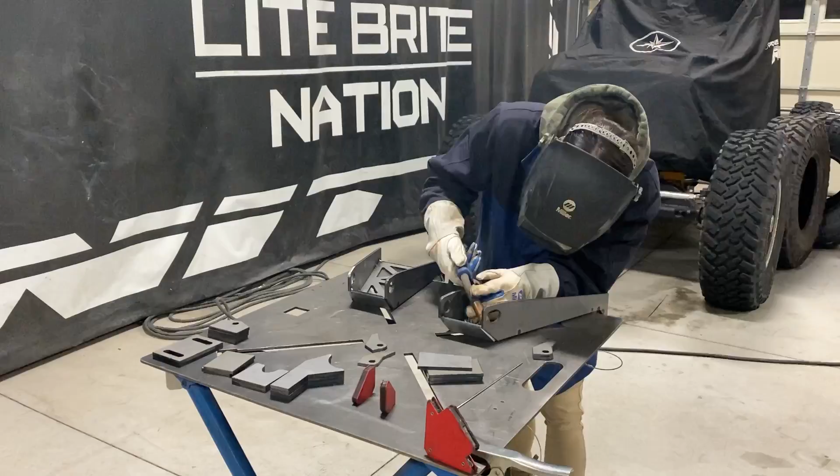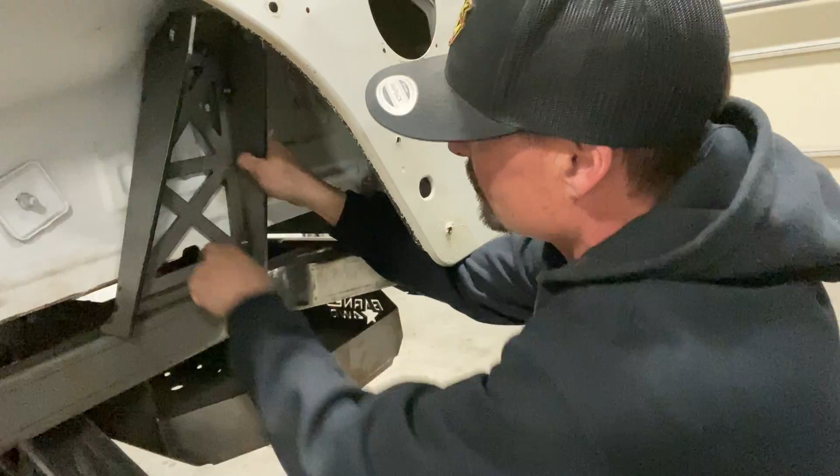Let me show you guys what I welded up. These things are sick. Can't wait. So that's gonna go up here, get welded across the top of the frame and then gusseted down the front. And we'll have room in the back to put even more gusset, but it's not touching the body and it's all the way up in this pocket.

And then the coilover should go straight down and it'll hang right off the back side of the axle, so that it should be almost perpendicular to that lower control arm. So we should have some pretty good control of this whole coilover setup. It's gonna be beautiful and work phenomenal.

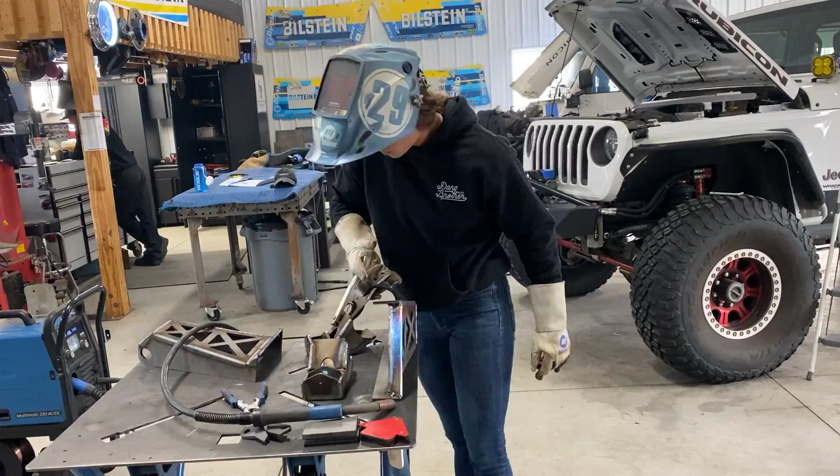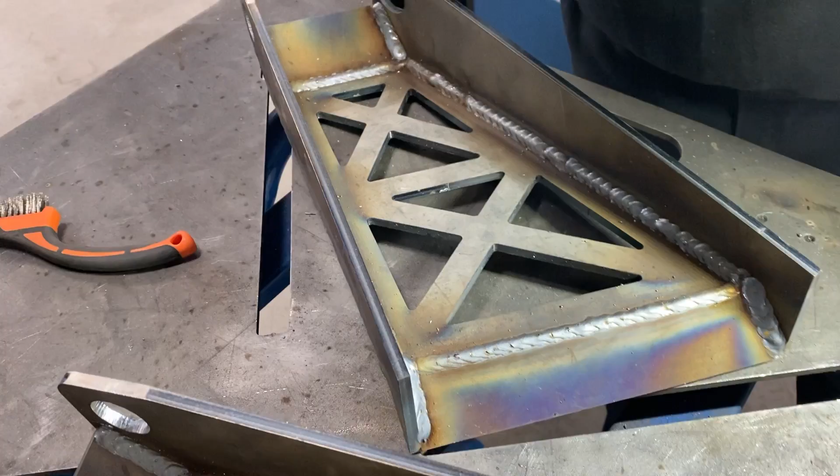You guys ready to see these welds? Yeah! Come take a look. You got a little man over here. The professional in action. Good Lord. My God. Guess who just took my job? I think I took it a long time ago. You did. She took it a long time ago. That's why I don't do any of the welding anymore. I just make pieces go together and she glues them. God, they look good. All right. Well, they're still warm. I can feel them there. All right, let's go get them in the Jeep.

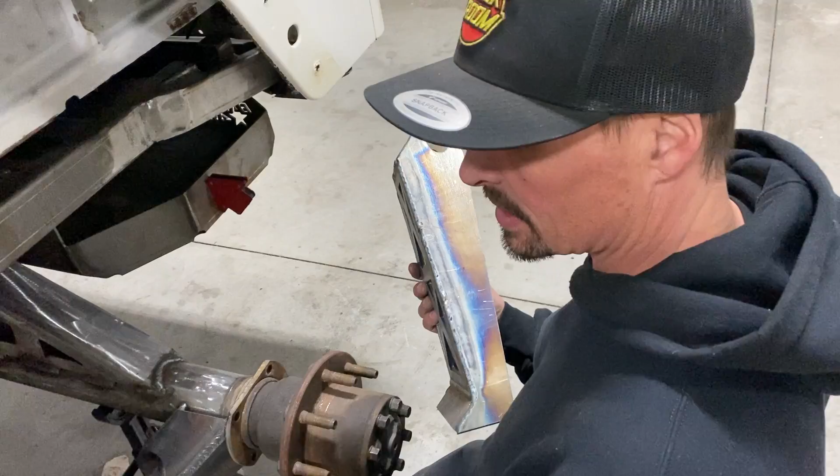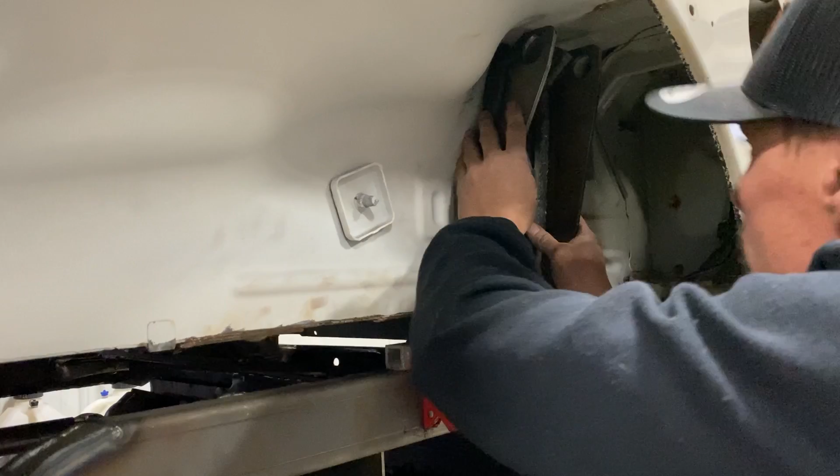All right, so what we're gonna do is we're gonna space them off the inside of the wheel well. I got some 1/4-inch rubber that we're just gonna lay in there so that we have some sort of gap. I don't wanna put steel in there because when we pull the body off, it might damage the body or not wanna come out real easy. So we'll just use some rubber, go like that. Come forward to about there, and that's where she's gonna go.

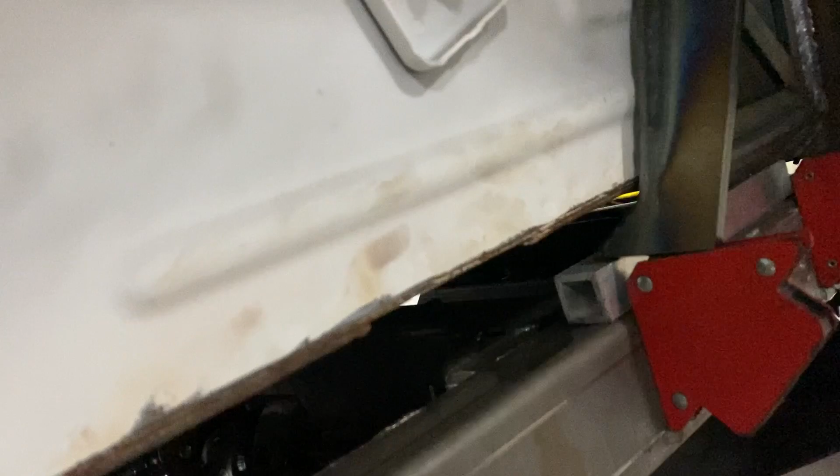So now we'll add the little fingers that'll go on here for the outside gusset. We'll get this welded on, and then when we pull the cab, we can build a big, strong gusset and go under and around the back and really grab the frame. But we'll have to do that once the cab comes up. But for now, let's get her to tack these guys in there.

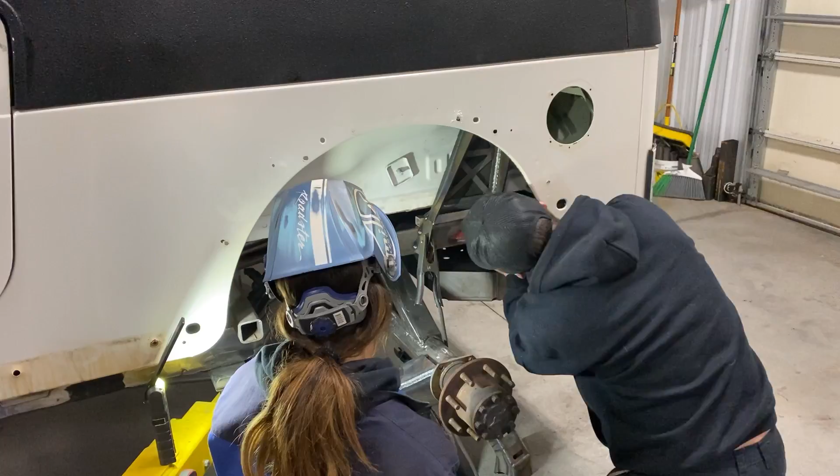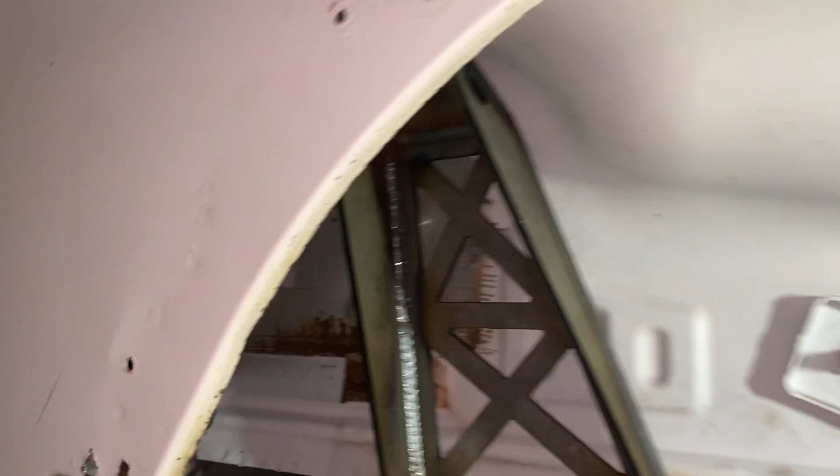There they are. They go all the way up to the top. Like I said, we're going to pull the body and I'll build a big gusset that'll wrap around the frame and pick up both sides, but we can't do it with it here, so we'll have to pull the body and then I can build a really nice gusset that she can weld in. Both sides. Woo woo.

All right, so going over this in its full capacity, we have decided that we need to cut the towers off and lower them down an inch. Yeah, I spaced them up an inch because my original calculations, at full stuff, I wanted that axle up against that frame. But once we started redoing all the articulation, it's gonna put the 40 too far up into the body at full articulation. It's gonna put that 40 like up here. I have to lose this inch, gain it back down here, so that we don't run into the tub.

Limitations. Yeah, and if we do limit it, that just means the other side loses an inch of down travel, which then turns it into a 13, and that's useless. So yeah, we're gonna cut these towers off and just lower them back down where I wanted them.

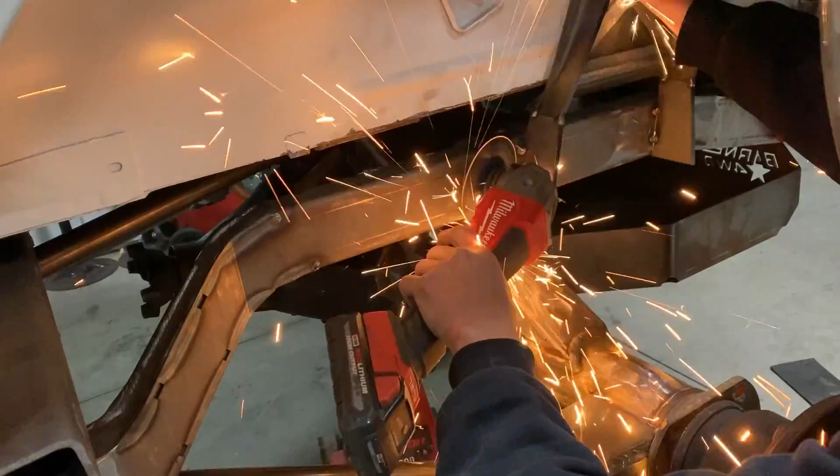Last night, Chris and I did retack the shock brackets and the towers back to where they need to be, because those are placed and looking great. We did articulate and made sure everything was perfect yet again. So today, the plan is to move on to the front shock towers.

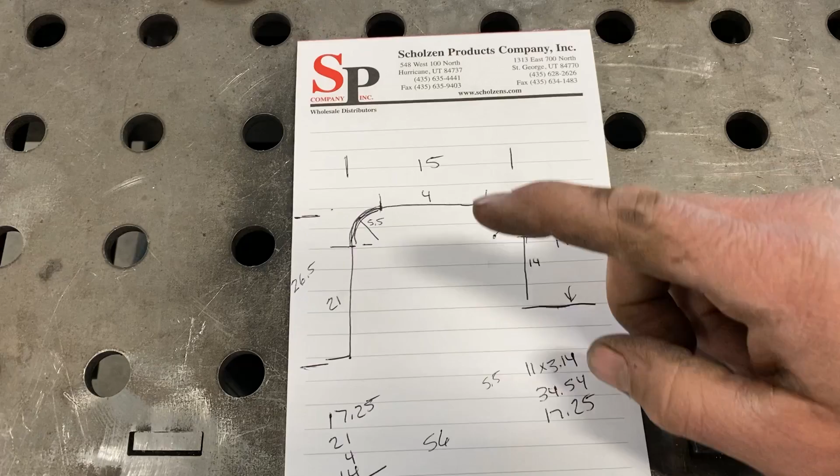We've gone back and forth with this a lot just because I didn't want to necessarily do tube for the front shock towers, but that is honestly the safest and strongest route. I don't know why, I just wanted something a little bit more intricate as far as design goes, but truth is also doing tube, it saves space under the engine bay, so that's what we're gonna go with. I guess here in a little bit we are gonna go dig out the tube bender and start getting after this.

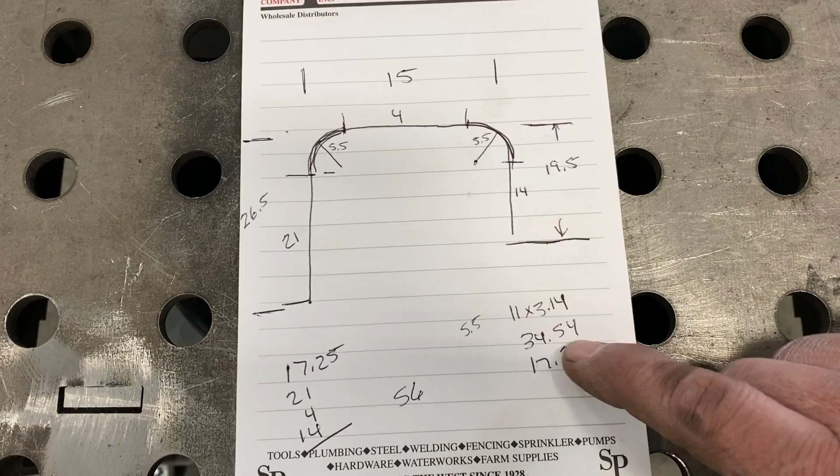So here's the sketch of what we need that is by no means dimensionally accurate. I do know from the bottom of the frame to the top I want it to be 26.5 inches to clear that AC compressor. I know from here to the other side I need 15 inches. And from there down to the bottom of the frame is another 19.5. With a 5.5 inch radius, the length of this tube, because I have the two of them, you take 11 inches times pi, gives you 34.5 inches roughly. Divide that in two, you get 17.25. So I know that the material that I need to bend this and this is 17.25 inches.

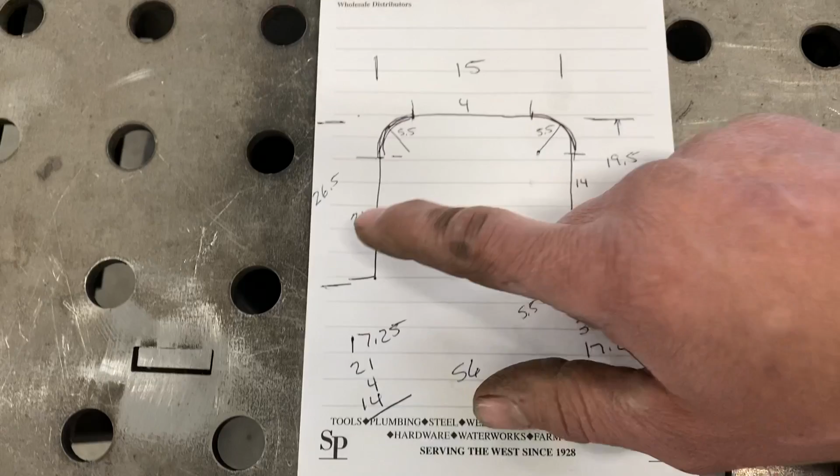So minus the 5.5 inches from 19.5, you get 14. Minus 11 from 15, you get 4, and minus 5.5 from 26.5, you get 21. So you add all that together, and it gives you 56 inches of tube that I need to make all of this, hopefully, in one shot. I did have a 10-foot section, so we ended up just getting two 60-inch pieces, but this will give us a rough dimensional length that we need to start bending. A little bit of extra, just in case. Yeah, because you know we might make mistakes, so there's 4 inches extra.

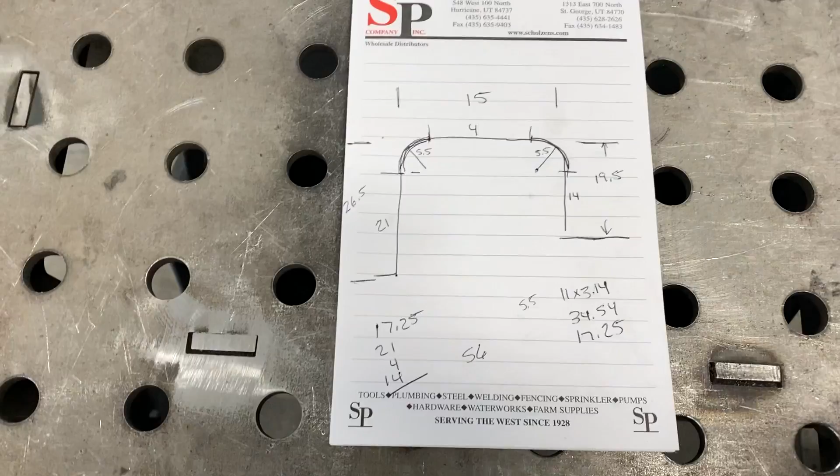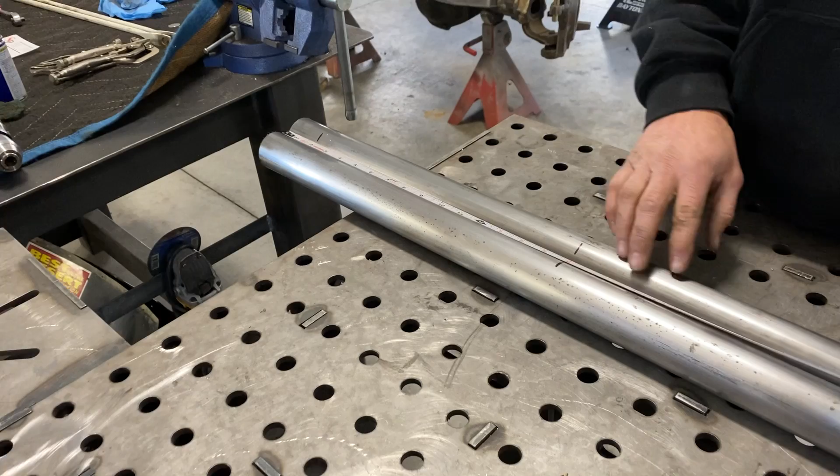Beck got the tubes all cleaned up. We got 2 of them cut to 5 feet. So now we're gonna brave the weather outside and I'm gonna bend these real quick. But first we're gonna make some marks. All right, so first things first, this is 60 inches. I know we can lose 4. So I bury 2 off of both ends. So then I take that measurement, run it all the way down to make another mark at 56.

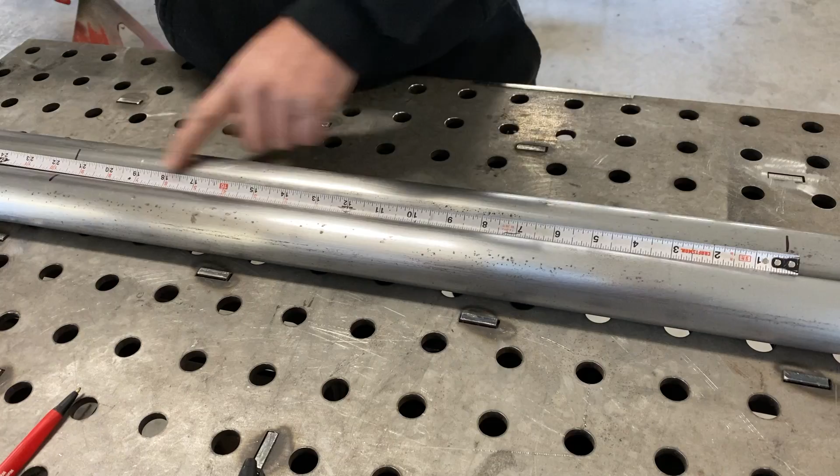And then from our 2 inches, our first mark is 14 on this side. Then I can spin the tape around and I can go from this mark. Our next measurement was 21. That leaves us 21.25 inches between the marks. And if we do the math, the 2 radiuses swallow up 17.25 plus the 4 inches in the middle. The material should leave us 21.25 inches of material between these 2 marks. And it does. So the math is right. So now we're gonna go outside and bend it.

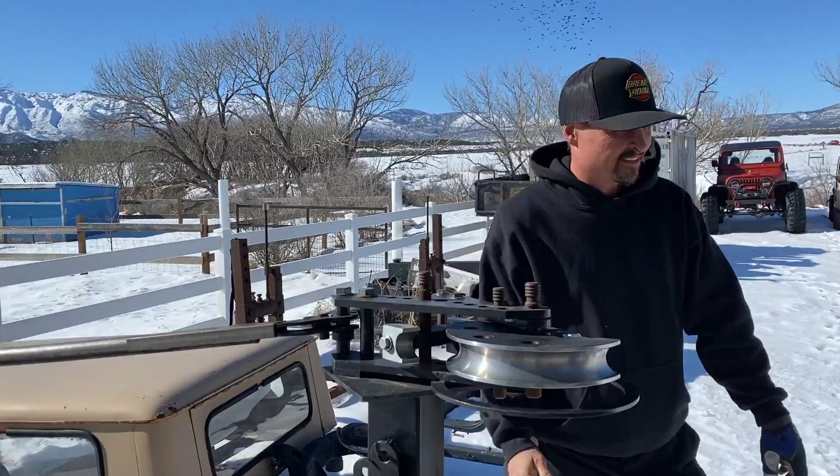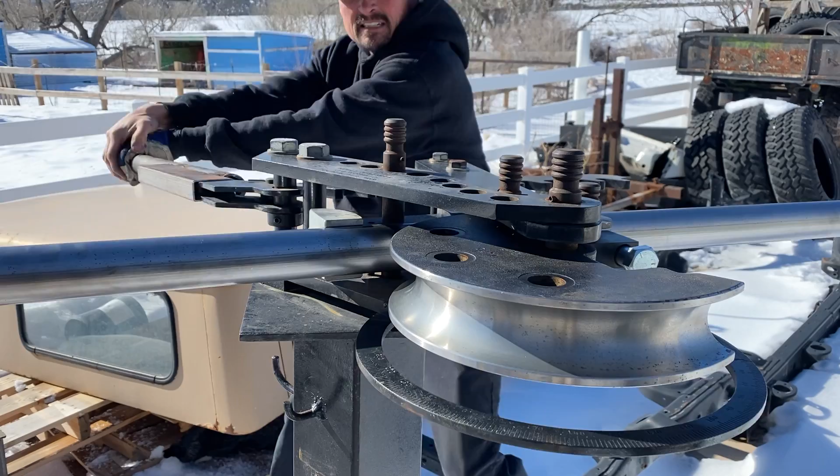Y'all, this is where our scrap tubing is. It's not just snow, it's friggin' ice. All right, plan B. Beck improvised for me and she welded me up a handle. We're gonna test it, see if it breaks. Ready? Ready. Really close. Oh, forget it. In the snow. This is where that 3 hours later will come in. 3 hours later. Woo! Chris got these bent up.

Yeah. And it was chilly. Yeah, it was chilly. Speaking of which, I had to change to a thicker hoodie because my other one was on the thin side.

So the axles are totally squared up with the body. So now we can start getting our measuring. So we are about 10 degrees back and 5 degrees in. And we're gonna build shock towers and brackets to that measurement. So first I'm gonna see about getting that tube placed in here and how we're gonna fit it exactly. And then we'll build hangers from that.

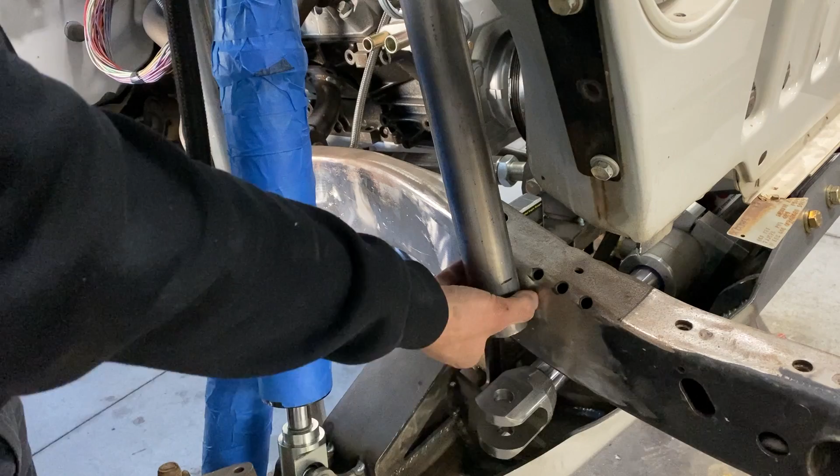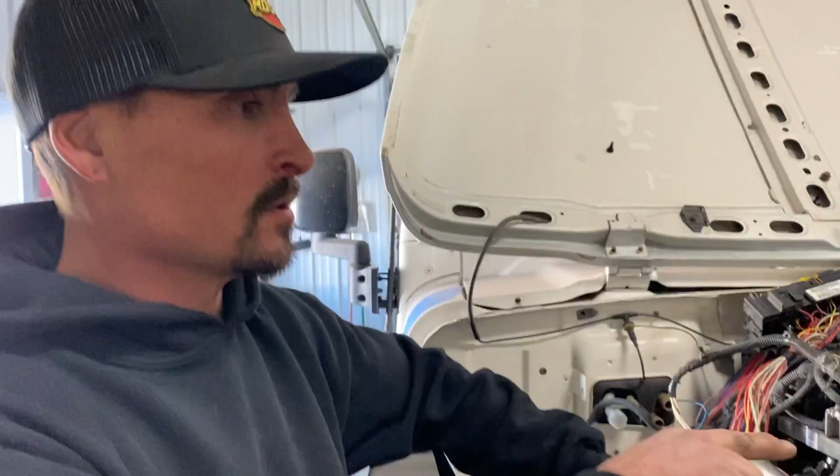Probably somewhere in here like this, maybe? Maybe I'll weld some tubes on here and we'll fish mouth this in. Or maybe I can knock it in farther. I don't know. Maybe we'll get it on top of the frame. I haven't quite figured that part out yet. And then we'll build some boxes to this guy. But then from there, we'll just link the two tops together with a removable bar. And those will be the towers.

So we might end up welding a nice big sleeve to that and then fish mouthing these onto the top and then gusseting the back side of both of them to the frame for some strength, and then we'll connect the tops, and then we'll build a box to that. I think that's what we're gonna come up with. So let's cut some probably 2-inch tubes. We'll weld them into the front of the frame and get those in first, and then we'll fish mouth this.

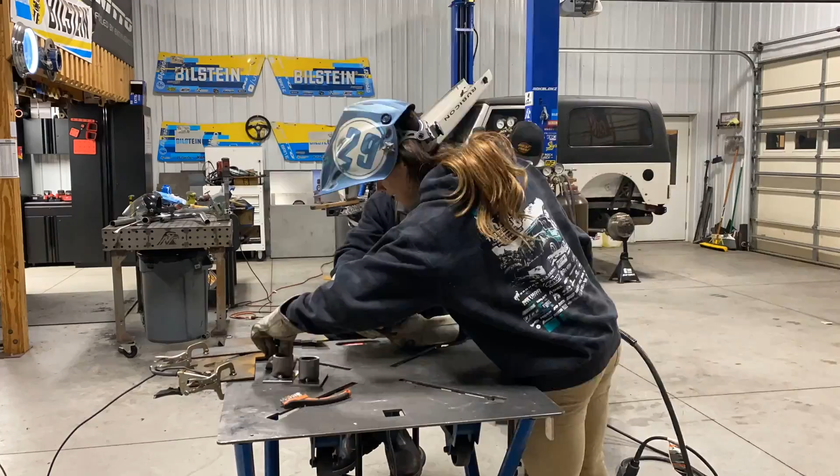Shock towers are mocked up and tacked in. It looks so awesome. Look at this, you guys. Honestly, it couldn't have worked out any better. The only thing is now we have to do it to the other side and it's got to match perfectly. Chris would like to walk you guys through the entire process. All right, show us the process.

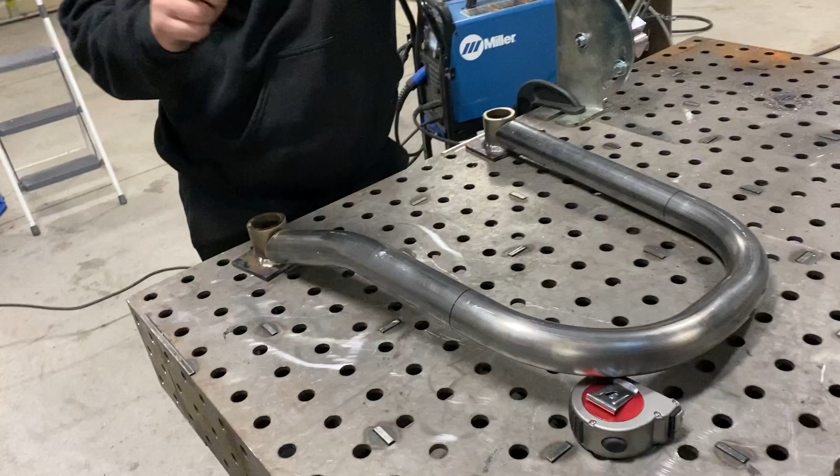So you saw the first bend. I didn't like how it sat in the Jeep. It was like narrower in the back, so I added this little kick to try to get that one side, the back side, out farther. And then what we ended up doing, these are still hot. Let me get Mittens. I didn't like the mittens.

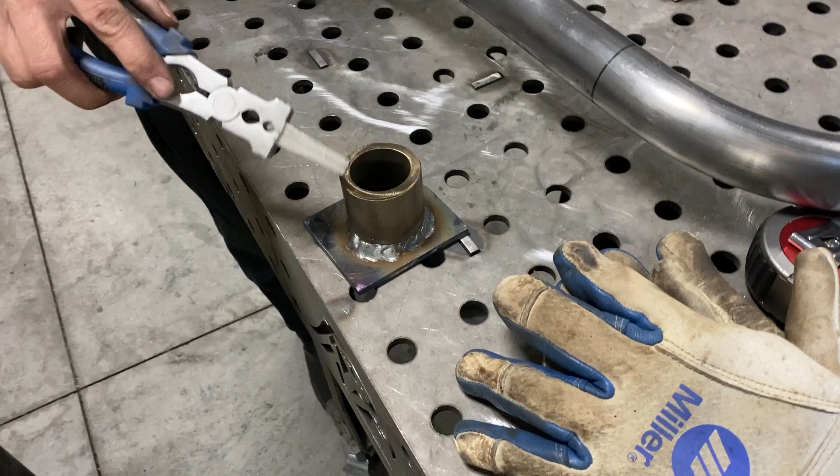I got some 2-inch tube. This is a quarter wall, 2-inch tube. We welded it onto a plate so that the frame just has more surface area to support this. If you just welded this straight to the frame, it's a smaller surface area and you could potentially rip this out of the frame. But now you have a big footprint, so that's why we went and did that.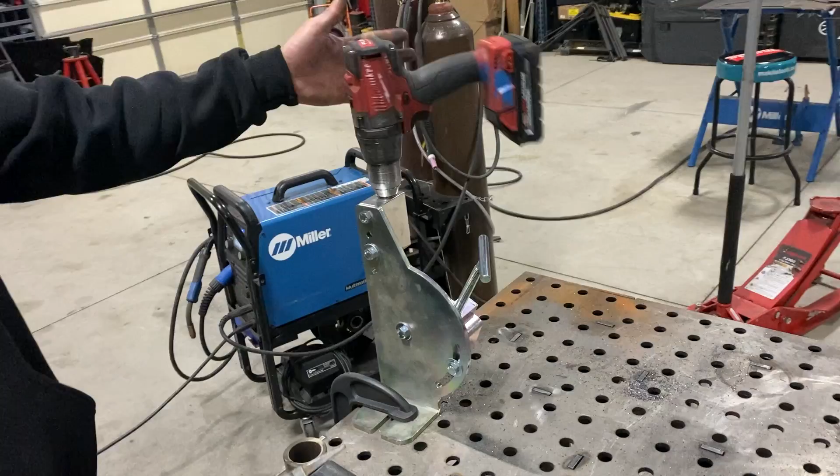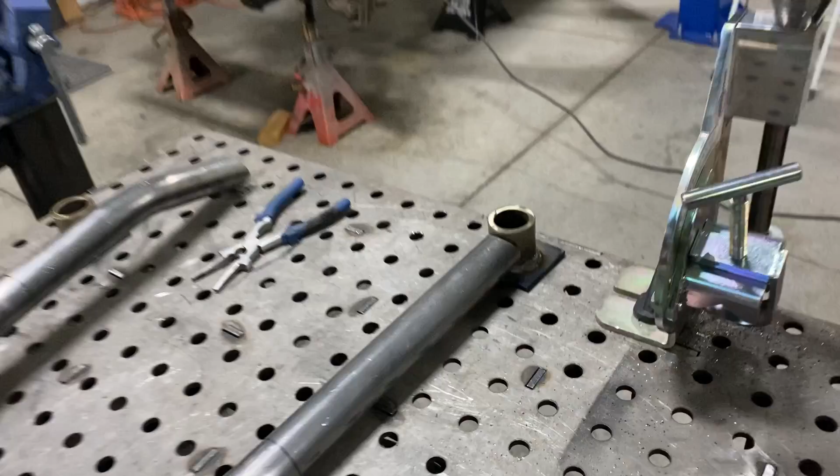Then we had to set up the notcher, and we used this beautiful tool right here. I got this one at Speedway Motors, just the tubing notcher. Very convenient to notch tube. And then you just put a 2-inch die or a 2-inch hole saw in there to cut a 2-inch radius mouth on 1 3/4 tube. And then that should fit on there perfectly, as you saw on the other side. So now, let's get this other side in.

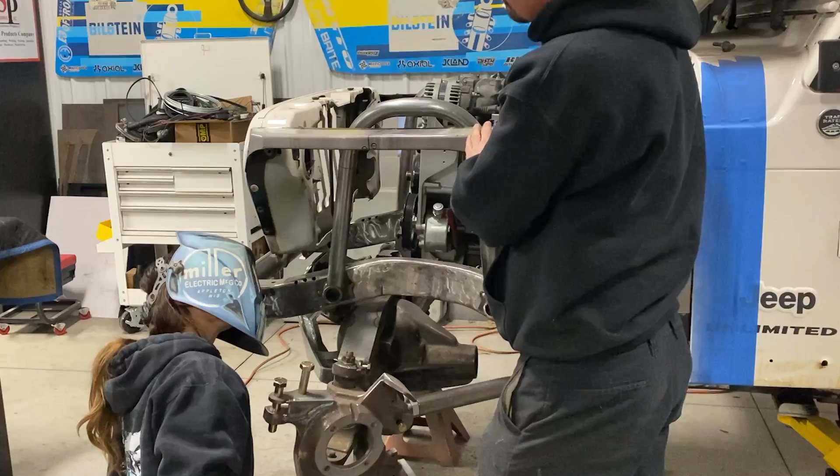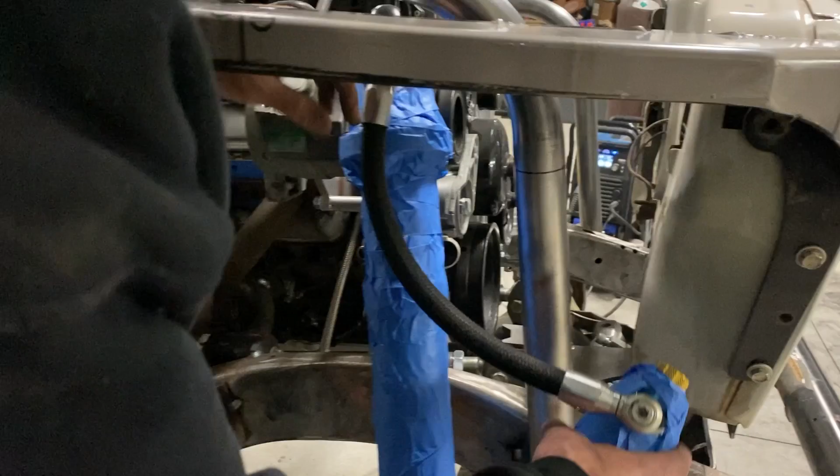Put that one over here and just clamp it onto there. Adjustability. This one will be like right here. Maybe we can put this outside of this guy or behind it. I don't know. Whatever we want to do. I'd be worried about the tire getting into it. But we can always do it this way too. We can do that right there and then adjust them from inside. That would work. Oh my God, this is coming out so good.

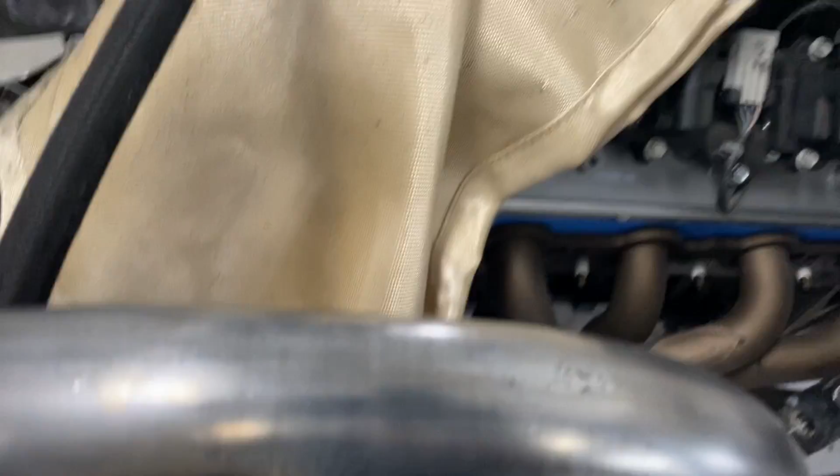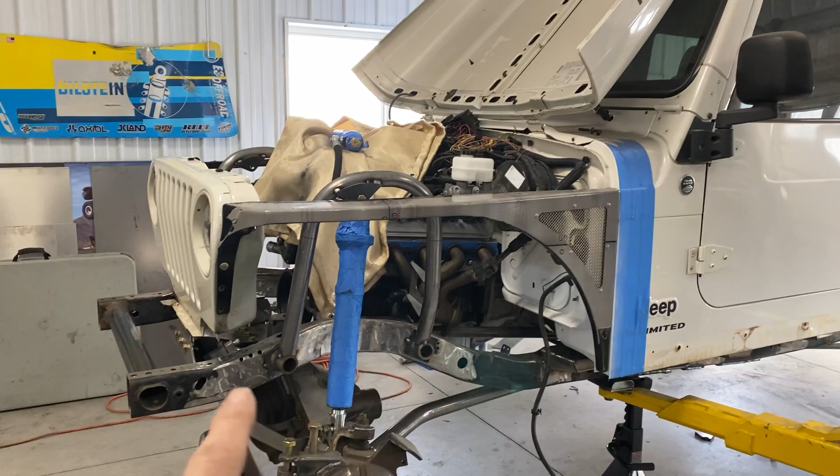Yeah, so now we're gonna yank the body off, and then Becca's gonna spend the day welding up all the frame stuff and all the shock towers, and then I'll build some gussets, and that is what we're gonna do today with this bad boy. She's gonna get a workout today.

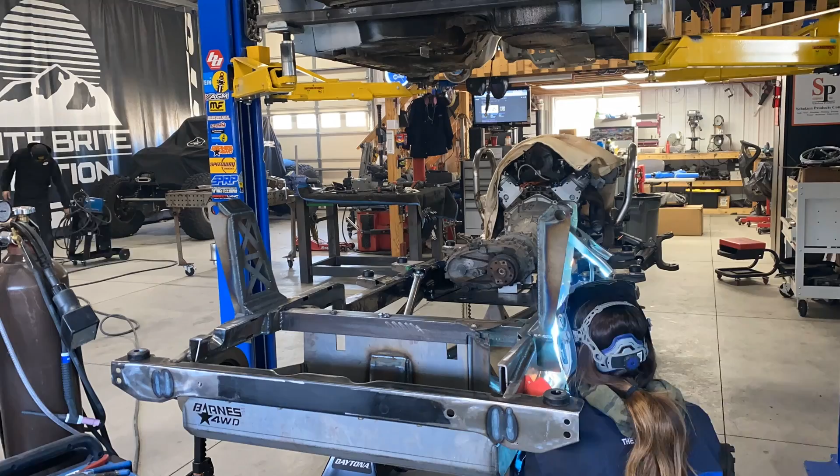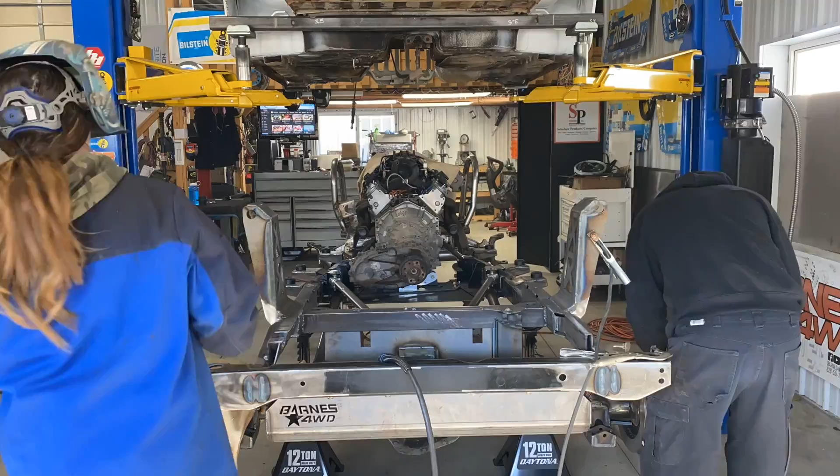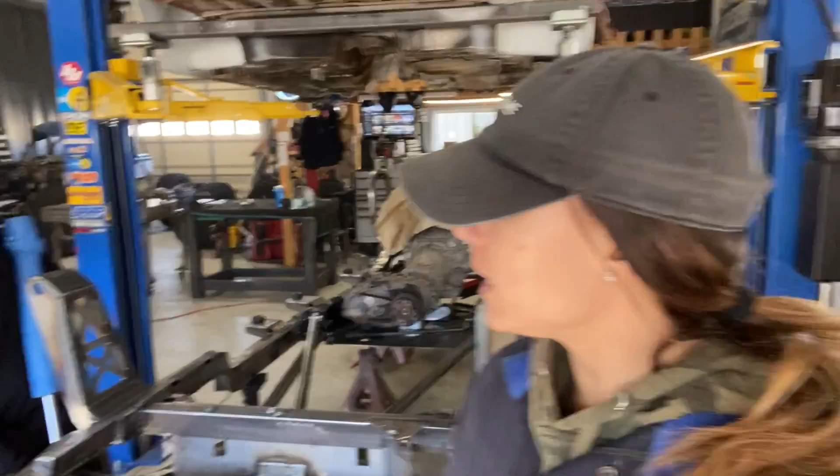So the shock towers are now completely welded up, and Chris and I are getting ready to put the shocks on, and then we're gonna do some articulating and make sure that the rear links will clear the frame, because we might have to French the frame in some just to allow more clearance for the links. We're pretty sure we have to do that in the front, but we're gonna check the rear and we're gonna check the front one more time.

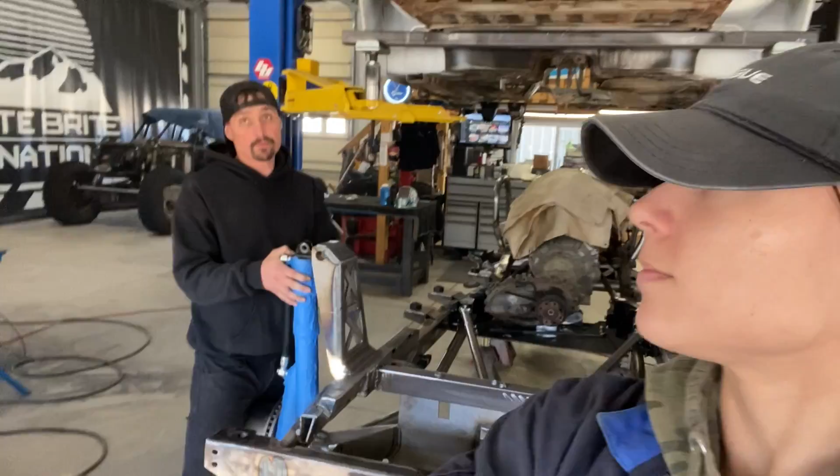Alrighty, so for the most part, the welding is done across the top of the frame. I still have some welding to do on the axles, but I'm gonna wait until we can drop them, so I can turn them where I want them and weld really nicely and comfortably. I will end up pulling the motor and the trans with Chris, and then we are going to flip the frame over so I can weld everything underneath. We can't do that right now though, because I'm waiting on one more part to come in, and once that comes in, weld that stuff on, and then we can do just that.

For now, we are going to close out the video doing some prep on Brite's buggy side chick. A while back when Kevin and I serviced it the last time, somehow we screwed up the spring rates and put them on the wrong corners and flip-flopped a bunch of stuff. So we're gonna yank the springs off, put them where they need to be, probably do an oil change on her, clean her up real good, and get her ready for Brite to take her out. So that's what we're gonna do for the rest of the day.

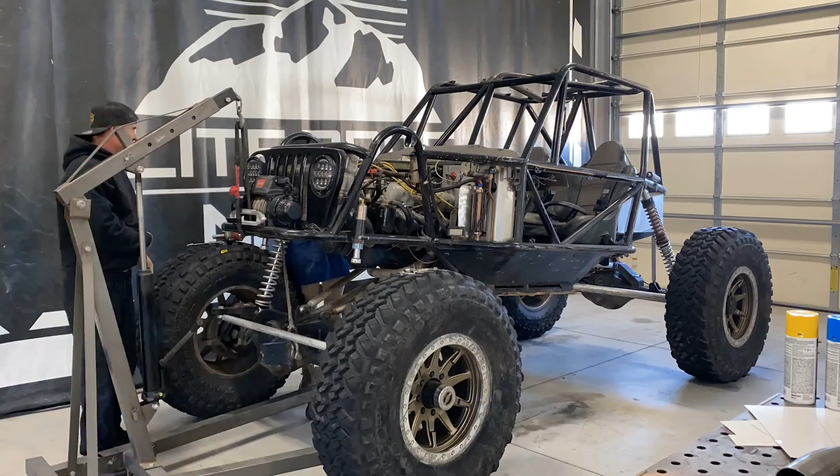Struggles of a simple service. Yep, now that was a bolt, but we're gonna be pretty much done with this thing. I'm gonna swap some springs over and we're gonna put it back together.